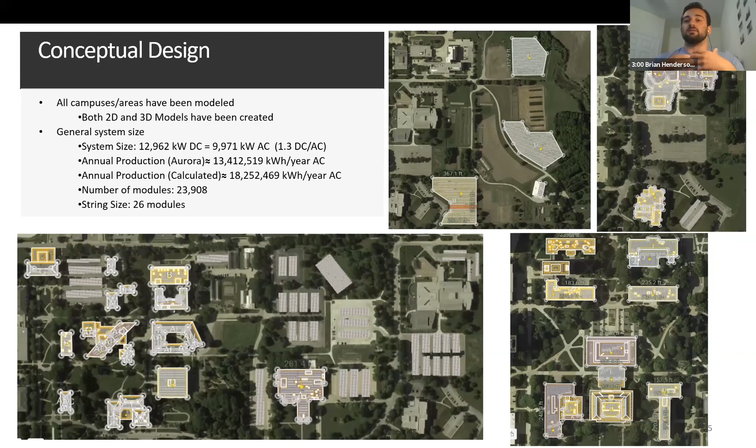We're using a 540 watt Jinko module. Now it has not been released, but it's going to be out by 2022. So we decided by the time something would get started, it would be a good module to use, as it's going to be more advanced, it's going to be larger, and be able to get more energy than a lot of modules that are out on the market right now. And we use that module all throughout the system, and we've got about 23,908. And our string sizing is going to be 26 modules.

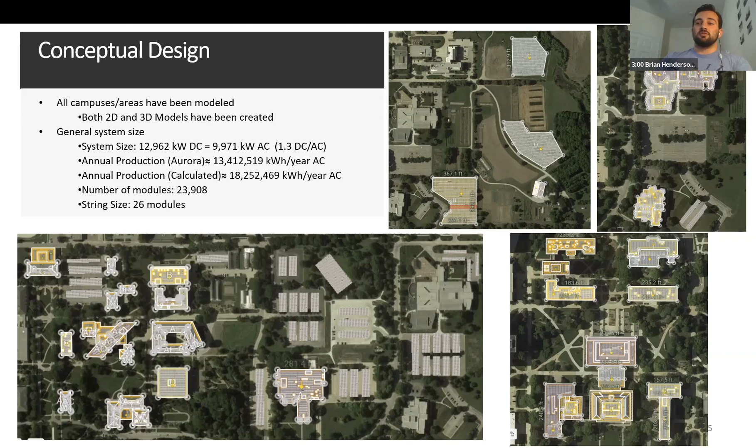Now, if you notice, the picture right next to the conceptual design is our agricultural fields. We had 3 main large arrays. All those are planned with a 30-foot setback for fencing and to allow any vehicles that need to get through there, any resources that need to get moved into the area. We have a large amount of carports throughout the campus, including one large carport system that would be over the basketball court. And then we put it on rooftops that would receive proper sunlight and would not have too much shading. Go to the next slide.

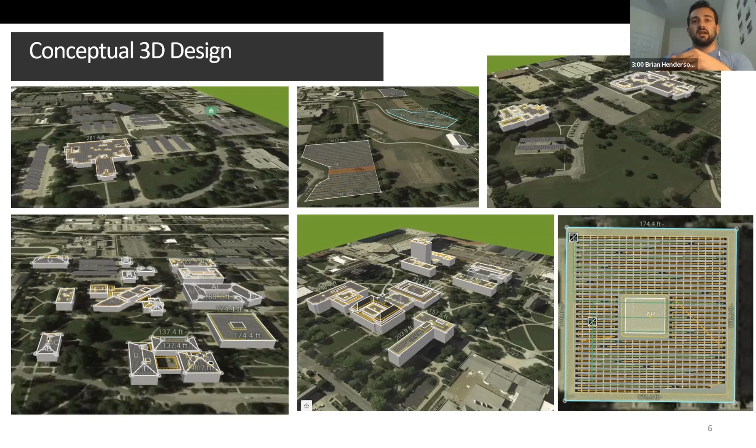This is a 3D look at most of the system, and then an example of some of the stringing. And if you go to the next slide, this is a look at our irradiance model using Aurora.

Every single array has an annual solar access of over 90%, and the majority have 95% or more annual solar access, which, having worked in the renewable industry as an intern last summer, I know that my company would not have accepted anything under 85% of annual solar access.

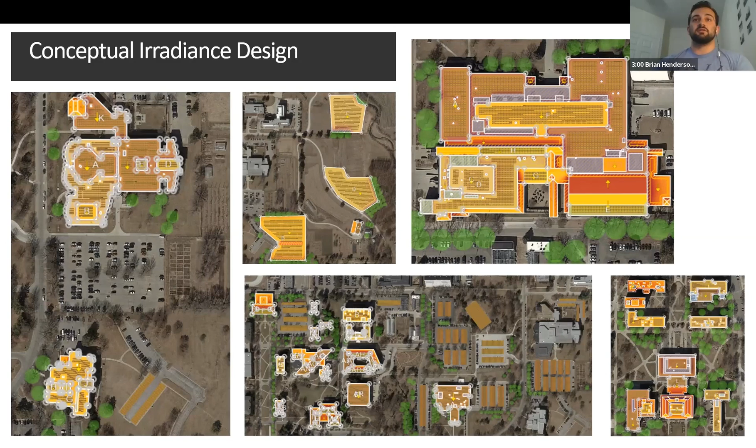Our development plan consists of both the building and site plan, as well as a construction plan and timeline. Our report has explained how both of these plans comply with restrictions such as zoning regulations, local codes, and the various permitting processes. These plans will focus on the analysis and construction on city campus, East Campus, and the agricultural field section of the campus located at the University of Nebraska-Lincoln. Hit the next slide.

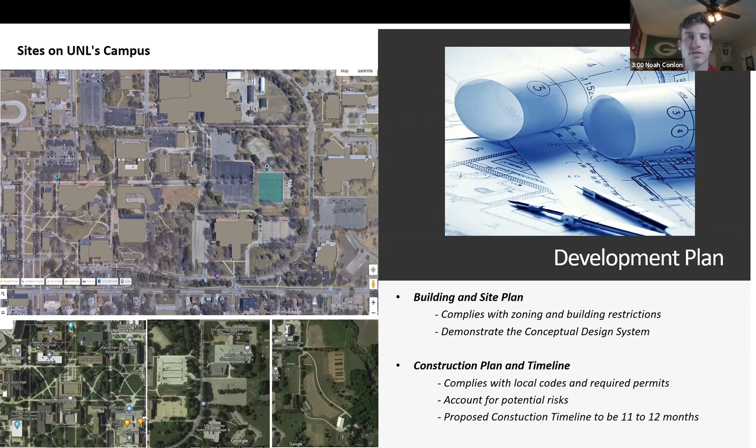Now into the building and site analysis. We will have rooftop mounted installations on both city and East Campus buildings, and ground mounted installations located on the agricultural field section of campus. When analyzing the rooftop mounted installations, the only building restriction to avoid will be the historical landmarks. So you can see in red on the city campus map, we'll need to avoid construction on the Sheldon Museum of Art located on city campus, as this building is one of the campus's historical landmarks. And there's no historical landmarks to avoid on East Campus.

So when analyzing the ground mounted installations on the agricultural field section of campus, we will need to consider more restrictions. Located in red on the agricultural fields map are high concentrations of bedrock, and bedrock's very difficult and expensive to drill through. So we will avoid ground mounted installations in these areas to keep our installation costs to a minimum. The other restrictions on this section of campus we'll need to avoid are any flood maps and wetlands. And according to the research I have conducted, there are no applicable wetlands or flood maps in this section of campus that we will need to avoid. Hit the next slide.

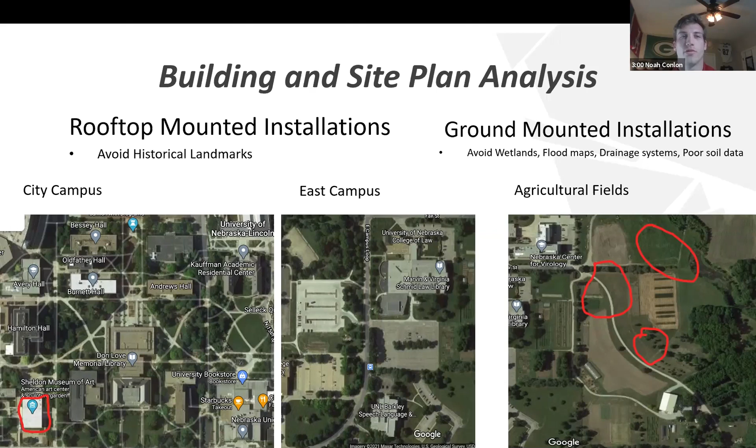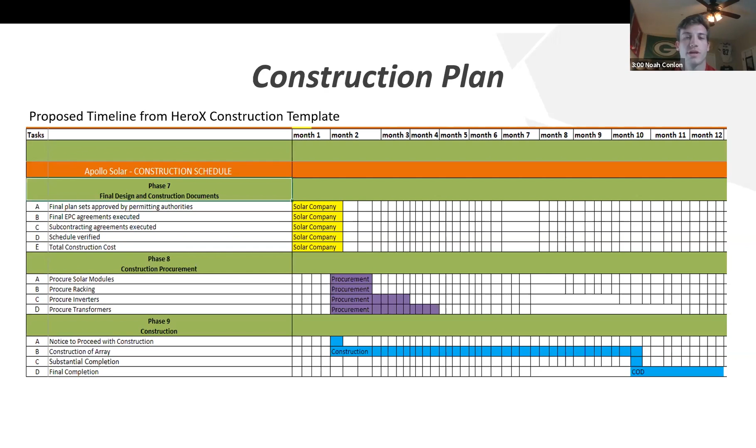The construction timeline was created using HeroX's construction template on HeatSpring. The final construction documents, such as the main building permit, the necessary secondary permits, and approval through the authority having jurisdiction, should take no more than a total of 5 weeks. The procurement processes will be finalized between 4 to 12 weeks. And after these steps, construction may begin. The timeline for completion of this project is set at 34 to 36 weeks. Although this might be a bit of a stretch, this time frame accounts for potential delays such as weather restrictions. So to conclude, our final timeline for completion of the entire project falls between 11 and 12 months total. Okay.

So now we'll touch a little bit on the distribution analysis side of our project. Basically, the way we iterated our designs throughout the project was Chase and I worked on OpenDSS while Brian was modeling these systems in Aurora, and he would send us numbers to model in OpenDSS. We would analyze those systems as built in OpenDSS, check for overvoltages and other distribution problems, and then iterate designs with smaller subarrays or moving some systems around to create systems that don't create large overvoltages. So in the end, we ended up with about 15 subarrays.

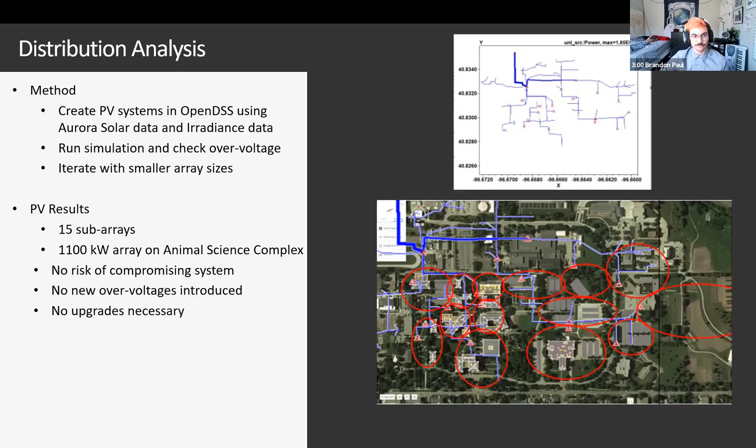So next I'll touch on the battery a little bit. As previously stated, our goal with the battery for UNL was to create a resilience case for the animal science complex. We wanted to cover at least 30% of the critical loads in the animal science building, and that is about $2 million worth of assets.

And that system needs to be entirely powered by the system on top of the animal science complex, which again is around 1.1 megawatts of power. So the outage we designed for this battery, since that was given to us to design, was a 1 hour outage twice a year. We preferred this outage because it gave us a little bit more leeway with battery size and kept prices and battery specs pretty manageable.

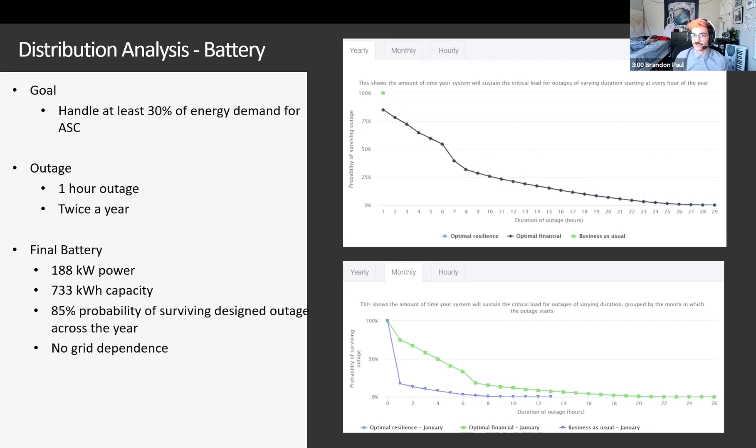The worst 2 months that we have for this battery case are December, January. That's only around about 75% chance of surviving an outage. And those numbers also sort of steadily decline past that first hour. This battery also has no grid dependence, so it'll be, like I said, entirely charged by the animal science complex system and will not be using the grid at all.

And of course, the system is only viable if it is financially viable. A financially viable system is indicated by a few key traits or terms, including an industry acceptable power purchase agreement, internal rate of return at least 11%, and a net present value of greater than 0.

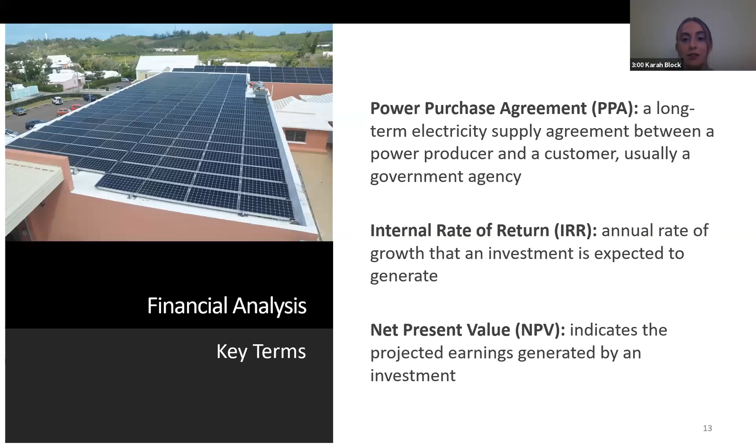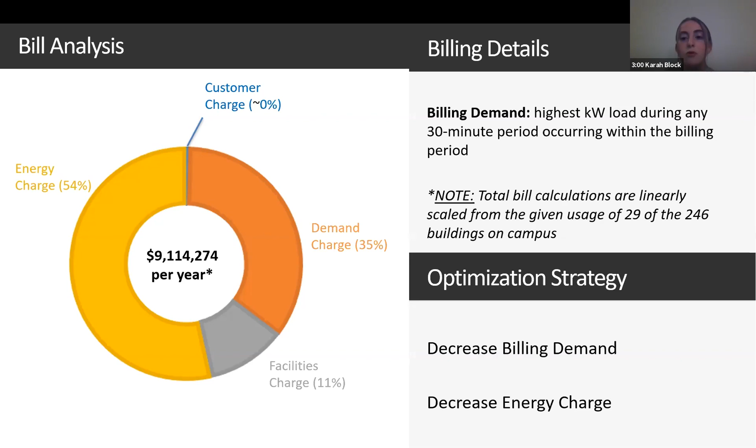If we go to the next slide, we will see our bill analysis. So far, the university itself as a whole spends about $9 million per year. This is a linearly scaled value from our 2 main campuses that we're looking at now. The 2 main campuses encompass about $1.1 million worth of electricity annually. With our optimization strategy, we propose to decrease the billing demand, which will in turn decrease our energy charge.

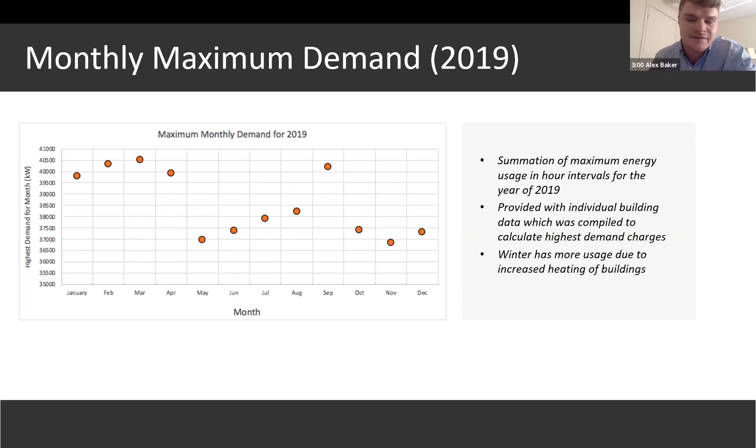And the initial installation cost is about $16.1 million, but with federal and state subsidies, this gets down to about $9 million installation cost. And the annual operating cost is about $170,000 a year, and that includes maintenance and cleaning costs. And again, our net present value is around $270,000, and our internal rate of return is about 15%.

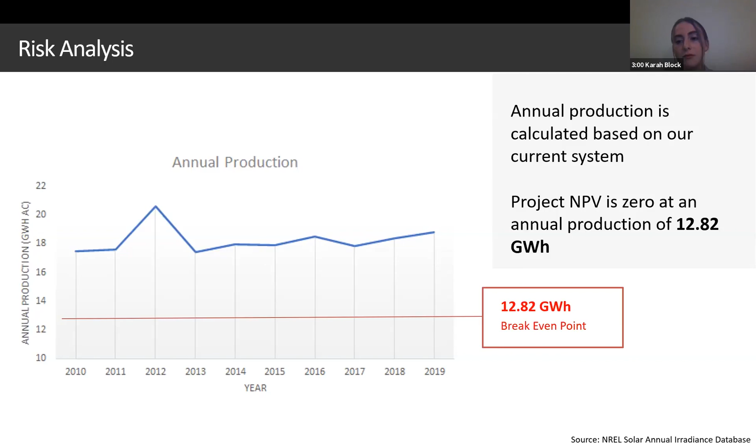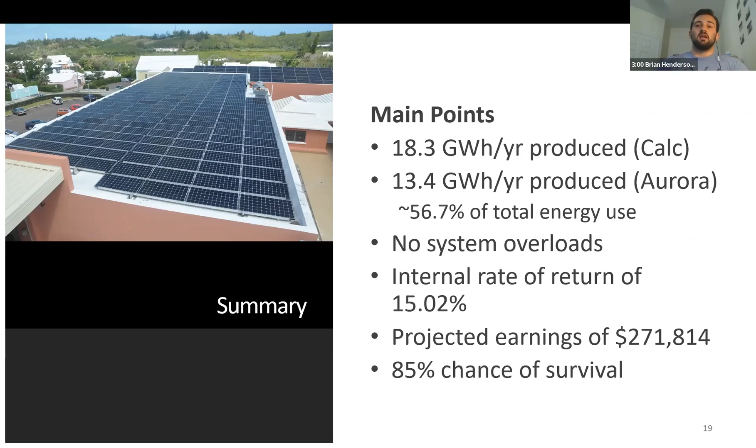So the main points of our system are that, calculated, we have an 18.3 gigawatt hour per year production. Using Aurora it is 13.4. We know that's not necessarily as accurate, and that's still above our break-even point regardless. We have about 56.7% of total energy usage offset, no system overloads at all, an internal rate of return of 15.02%, project earnings of a little more than $271,000, and an 85% chance of survival for our battery.